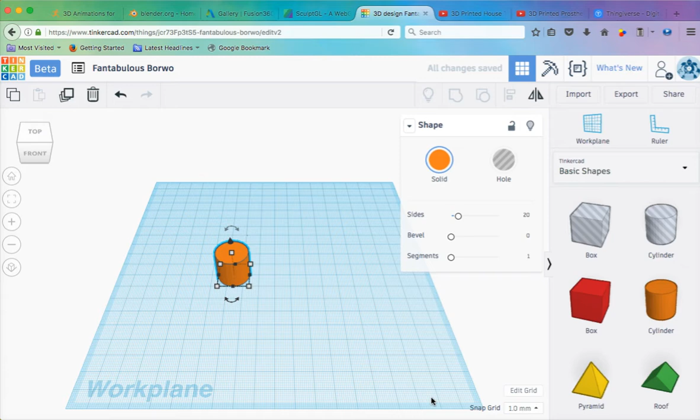So the way it works is you can grab shapes and start to put them on your plane, and you can look at them from different angles using this camera function here. And you can combine shapes together to make new shapes like that. So here we're going to group them together to combine things, and you have lots of choices, but you are kind of limited because you can't draw anything on your own.

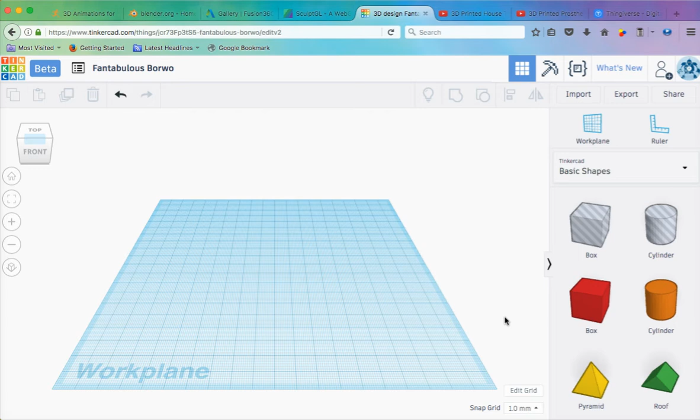So if I was making a spinner, what I would do is maybe start with a circle, and we're gonna follow the parameters, the rules of the bearing itself. So the bearing we know is 7 millimeters tall, so that's how tall I want my spinner to be. And I also know that the bearing is 22 millimeters wide.

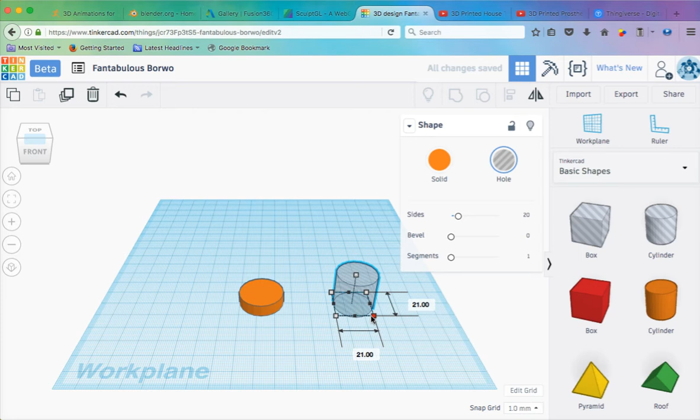So my hole needs to be 22 millimeters across in it. So I'm going to make a shape that's a little bigger than that. So this is 25 by 25, so you can see it's a circle. And now I'm going to cut out the size I need to fit the bearing. So I'm going to make this one 22, and I'm going to use this to kind of make almost like a cookie cutter and cut out this shape.

So I can see I'm a little off, so first thing I'm going to do is align the two together, make sure I'm right in the middle, and then by grouping them I'm going to actually cut out this hole. So you can see now I have the start of a spinner because this hole inside it is 22 millimeters.

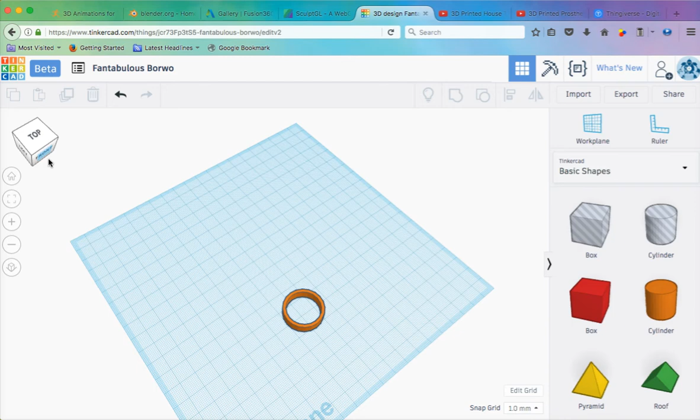Now of course I can design lots of other things on top of it, or on the outside. There's lots of cool shapes here. There's even some pretty interesting ones. I might add gears, or even like a texture, like these weave pieces. There's terrain.

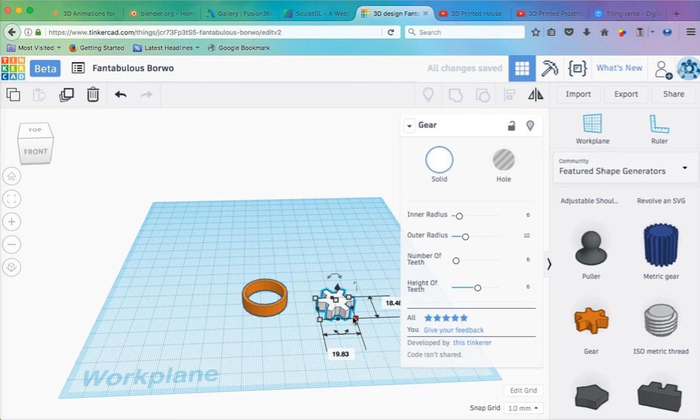So I could do the same thing with a gear, and either add that to it or put a bearing right in the center of it. But you can see that's how you're going to use Tinkercad to get started making things.

And of course there's also a really neat gallery of things that other people have made. And it is all cloud-based, so there's no software to download.

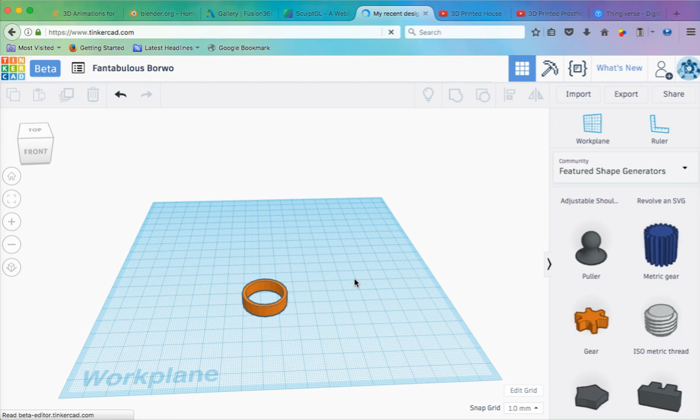Let's see if I can quickly show you the gallery. So these are things that other people have made and that you can download, you can manipulate, you can change, and of course print. So that's Tinkercad.